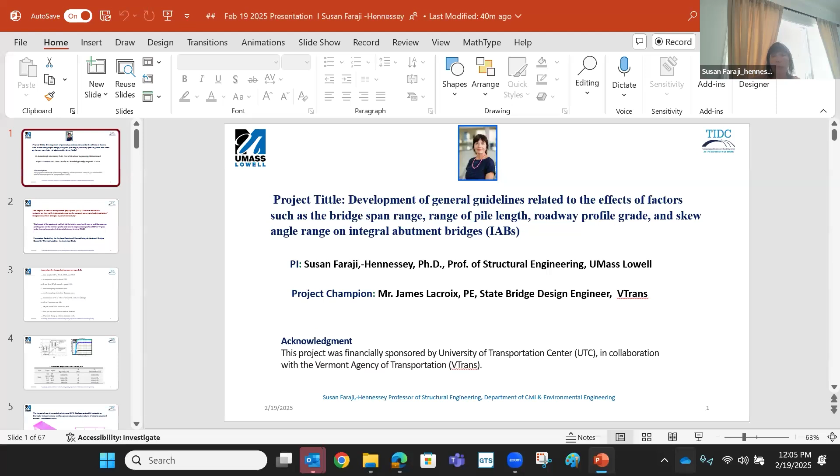So what I have been doing is I have been looking at different aspects. Let me show you the last thing listed on this slide, which was parameters controlling the in-plane rotation of skewed integral abutment bridges under thermal loading. This was analytical work that I did, and it has been very useful because the issue we have with integral abutment bridges, especially when skewed, is a problem.

So this is a presentation I'm going to give on this topic in France this coming July, and I have presented that particular topic many times. I have a few slides I can go over. The other one, in the middle of the page, was looking at the impact of abutment wall height, span length, and soil profile on design of piles and girders.

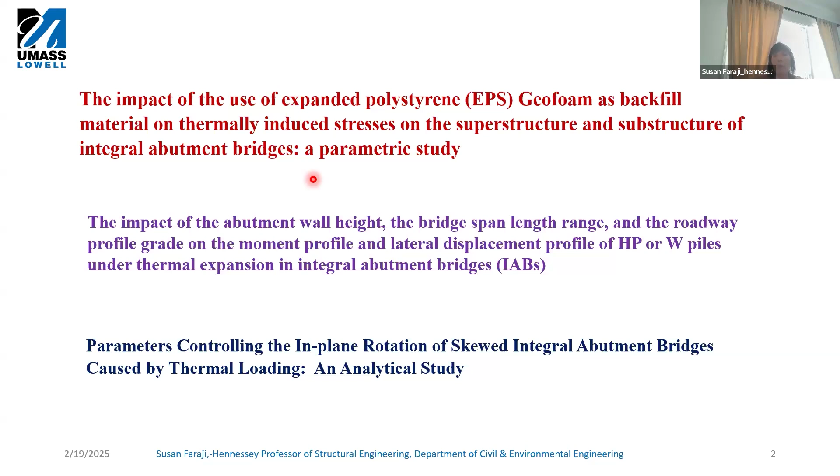Today my main focus would be the first topic here, which is the impact of use of EPS, or geofoam, as a backfill material in integral abutment bridges, and looking at how that impacts the girder and pile design. The major issue with that is how do we make sure we do that correctly.

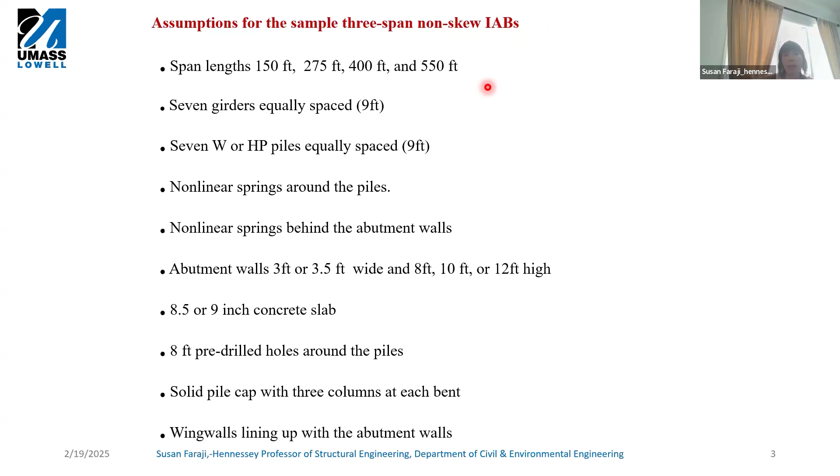For this particular TIDC project, from the beginning I have created many sample three-dimensional finite element models with different span lengths, looking at different abutment wall heights and soil conditions for analysis purposes. The type of soil I've been using behind abutment walls and around the piles was original information I had for one of the bridges in Massachusetts, which I've worked with in the past to make sure everything is consistent.

Now let's look at this particular topic: use of EPS. When it comes to use of EPS for reducing pressure behind the abutment walls, one of the issues we have is how to model and consider the EPS. Should we use linear springs? Should we use non-linear? How do we go about it?

As you see here, when you have an abutment wall, we use EPS with different thicknesses depending on our span length and abutment wall height. We decide what kind of thickness to use for the EPS, and then we go through our analysis with the compacted soil under the approach slab behind it and all that.

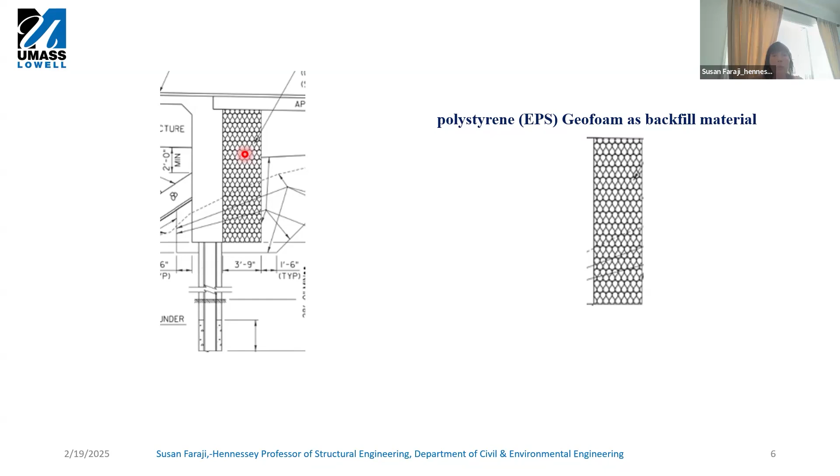So I looked at linear springs and all that, and finally it was very difficult to get information about EPS from manufacturers. So I decided to take my EPS and model it as a solid block, the same way we model pile caps as a hammerhead or solid, and treat it the same way. This way I didn't have to second guess whether I was doing it right or wrong. So that's what I did.

The other issue I was dealing with was our modeling technique. I'm talking about two things here: the modeling technique that impacts our results, and the other issue of when we have our girders. In my sample bridges I had 7 girders, and how do you link them together?

The original design I had from a 150 foot bridge in Massachusetts had cross bracing, which sometimes could be in a form I'm showing you on this slide. This makes modeling very difficult in the sense of how do we connect it, how do we define additional nodes. Sometimes these cross beams connect between the web and the flange, and sometimes, as in different papers, people model the flange separately and the web separately to handle the cross bracing.

So I decided to reuse this approach because one other problem we have with three-dimensional models is the way we link the slab and girders together—it's too flexible compared to an actual bridge, where the slab and girders work like a grid together. So I said, what if instead of using cross bracing between girders, I use a rigid plane element? This option was available to me in the GT STRUDL software I'm using.

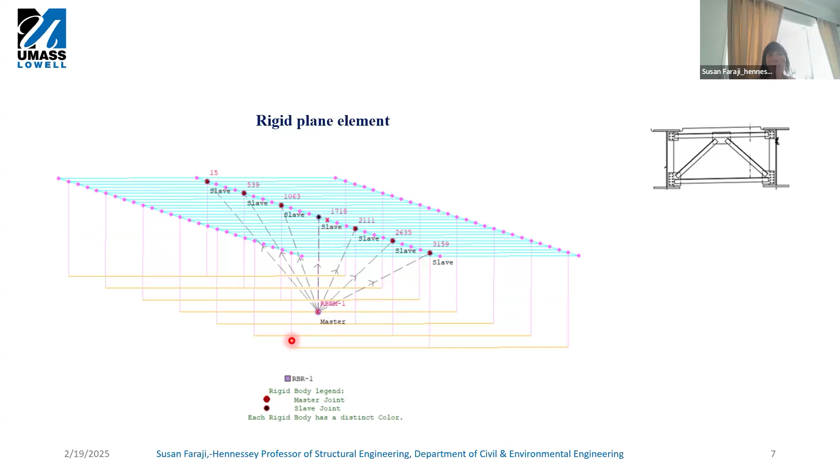The picture on the left shows how that works: there's a master node at mid-span, at the width of the bridge in the middle, which links the different nodes that exist on the girder to that node. In other words, it creates a rigid system. This was tested, and the results are pretty good compared to what we get using the previous approach.

So again, as I said, there are two different important factors here.

This is a topic I'm going to be presenting in March at University of Miami's symposium. So again, I repeat, the two aspects are how do we define our cross bracing, and the other is how accurate is our modeling of geofoam.

Now let me show you a few slides on the results comparing EPS with different thicknesses to dense soil. You'll notice in all of these, I used 7 girders. The difficulty with integral abutment bridges is what we call edge effect, where towards the edges of the bridge the impact is different. All the girders don't behave the same way, and this is especially critical on the piles.

In this particular example, I used 7 girders, so we look at the plate girder at the center line of the bridge to make sure those edge impacts are not present.

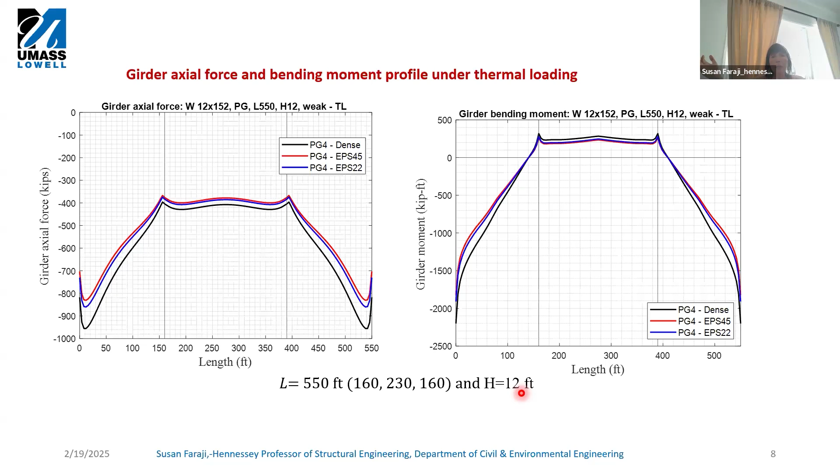As I said, I ran different examples from 150 to 550 feet to see the changes based on span. This one is for the longer span, three-span bridge.

Now look at this table, which takes information from those plots and lists how much change we see in axial force at the abutment, because the bottom line is the connection. The more important factor in girder design is the connection, especially if it's a moment connection, like my example with the wall.

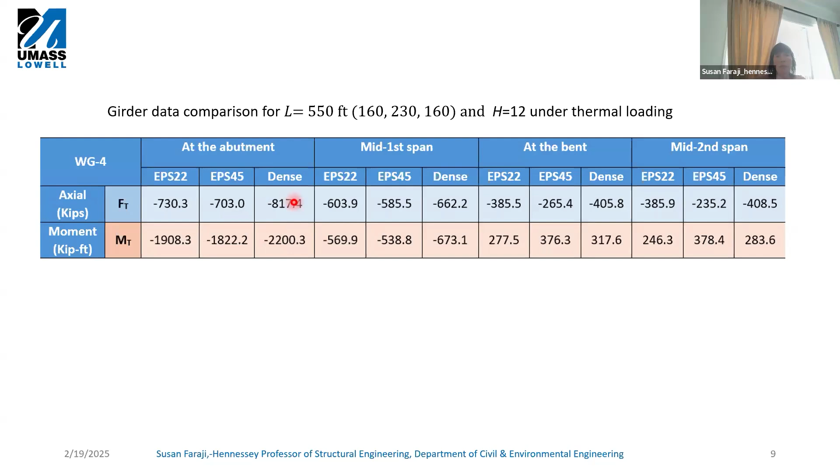As you see, by using EPS, we give more flexibility, and the axial force in the girder decreases, and so does the bending moment.

So then we look at the pattern, and the question arises: if the wall is moving more, would that not have a bad impact on the piles, since the piles have to move more?

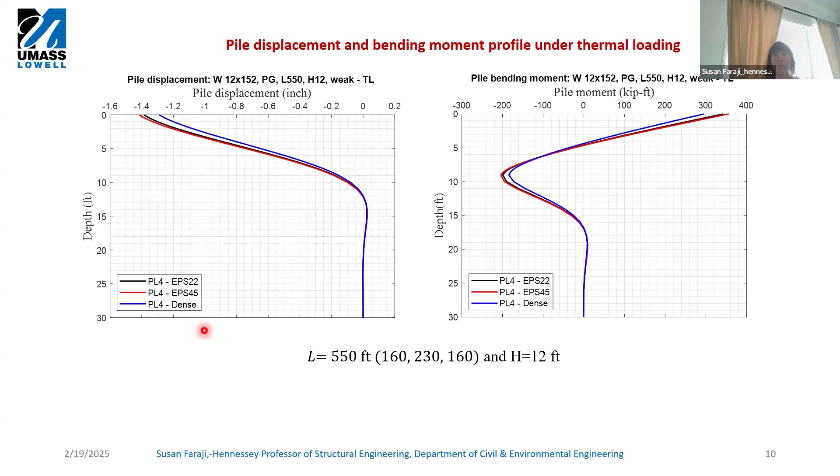This is summarized in this table, where delta, the first row, shows displacement at the deck level, and the second row shows displacement at the pile level, at the bottom of the wall. M1 shows the moment at the connection between the pile and the abutment wall.

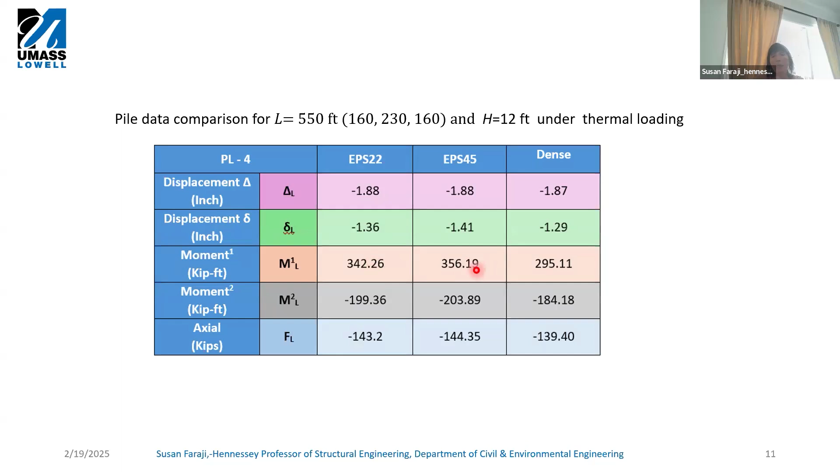All these examples ranged from 150 to 550 feet. For shorter spans, I used HP piles, and for longer spans like this one, I used W shapes for the piles. As you see here, using EPS results in some increase in bending moment in the piles.

We've done lots of analysis for truck load and dead load. Of course, temperature load doesn't happen by itself, it's accompanied by dead load, but the focus here was just the impact of temperature. I have extensive results for dead plus temperature, for the truck, for the TIDC project, in a complete documentation I have to submit by the end of this coming summer. Those who are interested can always have access to it.

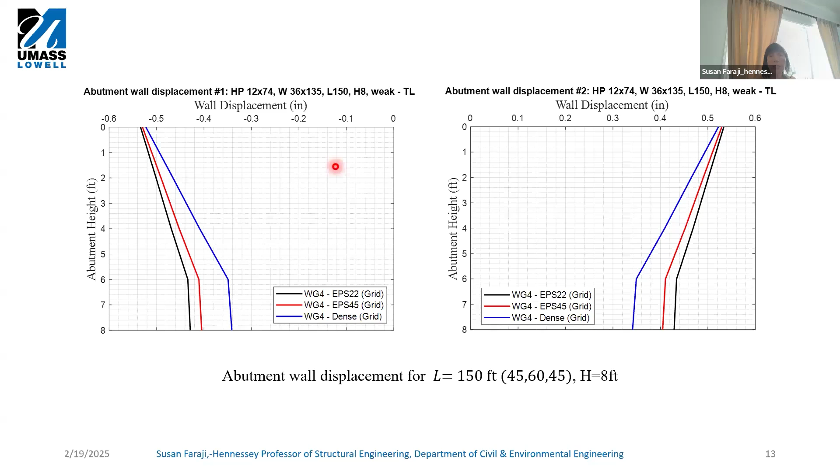This again shows the wall movement for the shortest span I used for my sample bridge, and as you can see, the impact is very small.

The same thing for the 150 foot span here, showing plots of axial force and bending moment over the three-span for the girders. In this case, for the 150 foot bridge, the height of the wall was 8 feet.

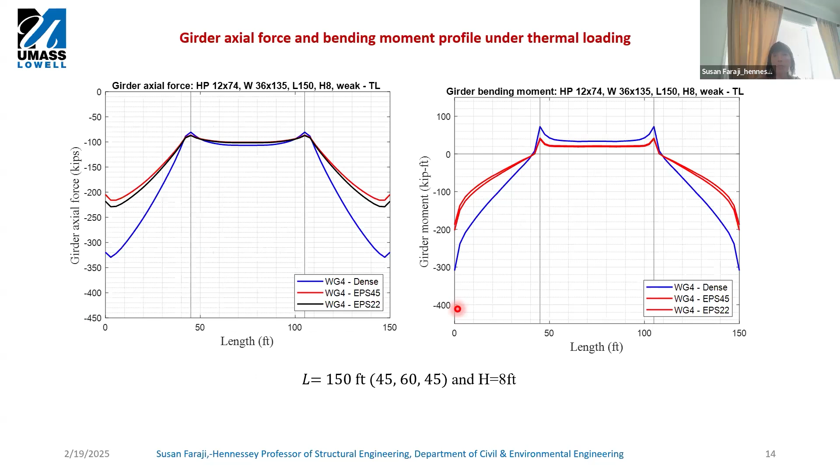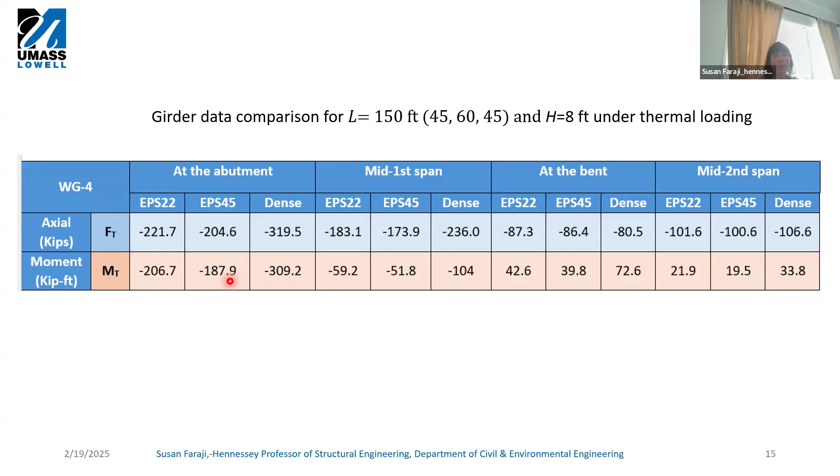Again, you see the similar pattern, but this time when we look at the maximum value in the bending moment, again, we see that decrease with EPS compared to the dense soil behind the abutment wall. And actually, you see major changes.

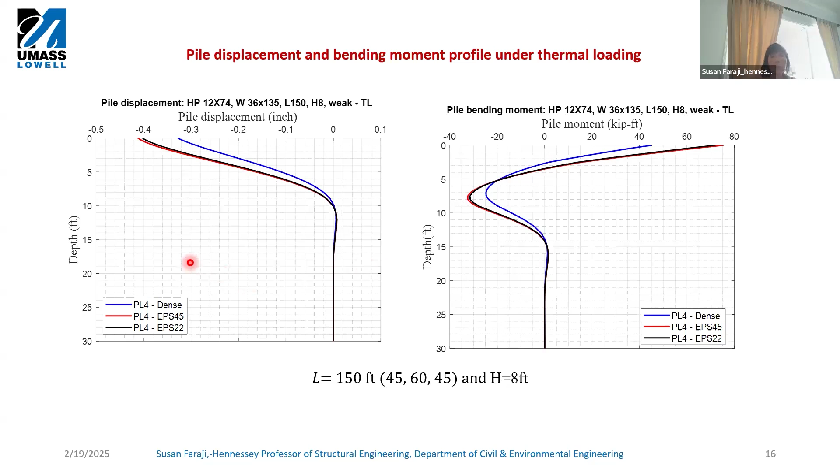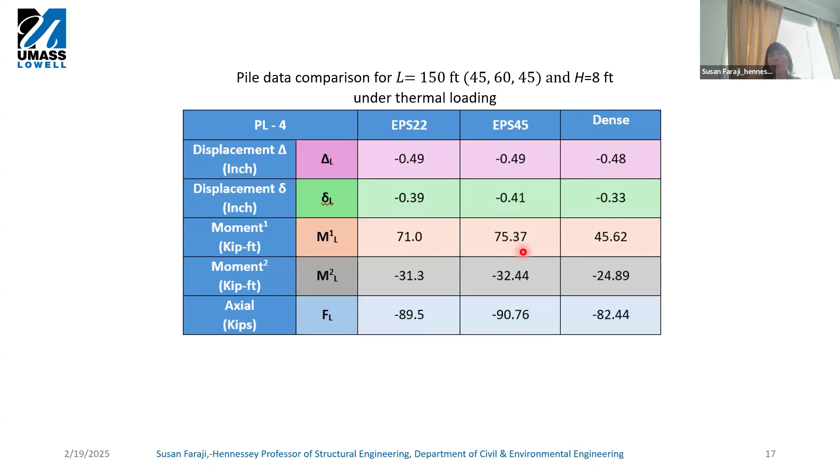But then here is another displacement profile for the 150 piles that shows the same similar pattern. And this is the table where, again, we are just comparing bending moment M1 at the connection between the pile and abutment wall. You notice that for the case of the 150, there was a huge increase, but still, because the moments are small, the impact is less noticeable on the piles.

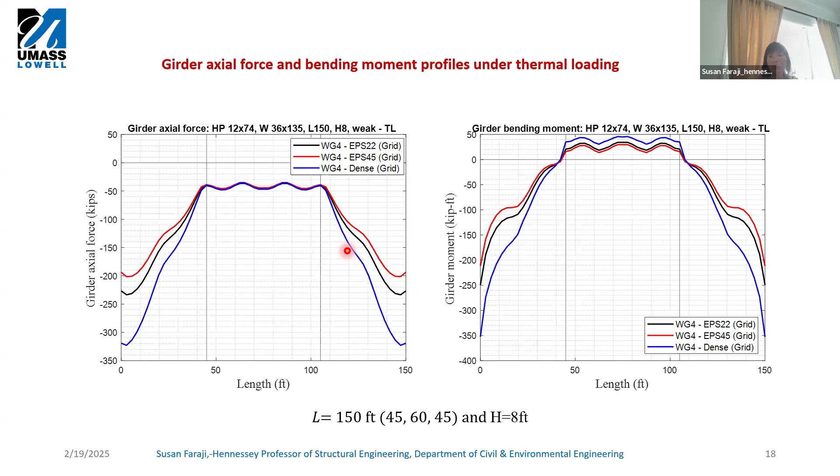And in this plot here, I was just trying to look at what I call the grid system, introducing those rigid planes into my model. As you see, the other plots of axial force and bending moment were smooth, but when you use these rigid plane elements, you see the bumpy locations are just where those plates are coming in, but still the results are very similar. I'm trying to work on how we make those points more smooth. The reason I'm insisting on it is it makes modeling so much easier compared to trying to introduce cross bracing.

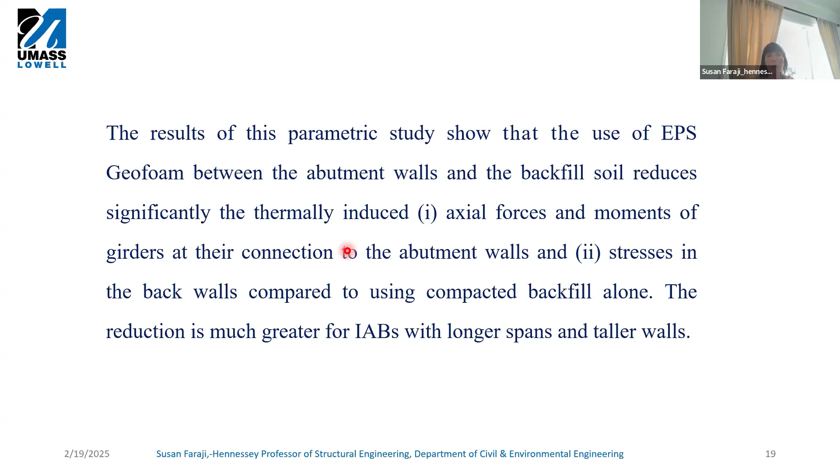All right, so the bottom line is it is obvious that use of EPS has a major impact on our girder design, our piles, and design of our abutment walls. But it is obvious that EPS would be more critical to be used when we have much longer spans.

Very quickly, because time is limited, I want to go over this. I have presented this particular topic, looking at impact of grade profile and span length and all that, in the previous presentations. And one of the things that is important based on what I did here, when I call it K1 and K2, is because in integral abutment bridges relative stiffness matters.

What is important here is it really doesn't matter whether the difference of the stiffness is coming from sloping ground, from abutment wall height differences, or compactness of the soil behind one abutment with respect to the other. So that's why it is important. One of my findings on this was, when you don't have perfect symmetry at your abutments, you really need a 3D model if you want accurate results.

So very quickly, all of these plots that you see, Mr. Harsh Gandhi, who is my PhD doctoral student, has been creating, and I'm sharing them with you. So for example, here I'm showing that for a 150 feet span bridge, one abutment compared to the other abutment has the same identical conditions, or one has 5% more stiffness compared to the other.

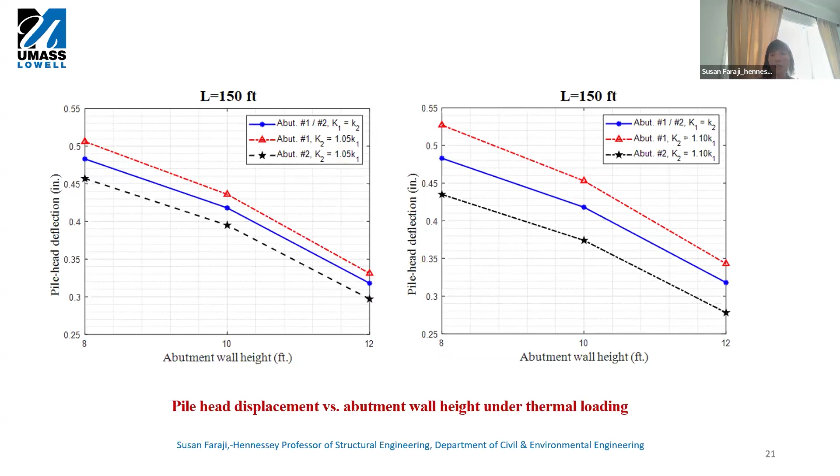And so it shows what happens to the change we see over the abutment wall height. What is the impact of abutment wall height compared to when the stiffness behind the walls is not the same? So these are all going to be in my report, and I have created lots of plots that preliminary design engineers can use to help their design. So I'm going to go quickly through these.

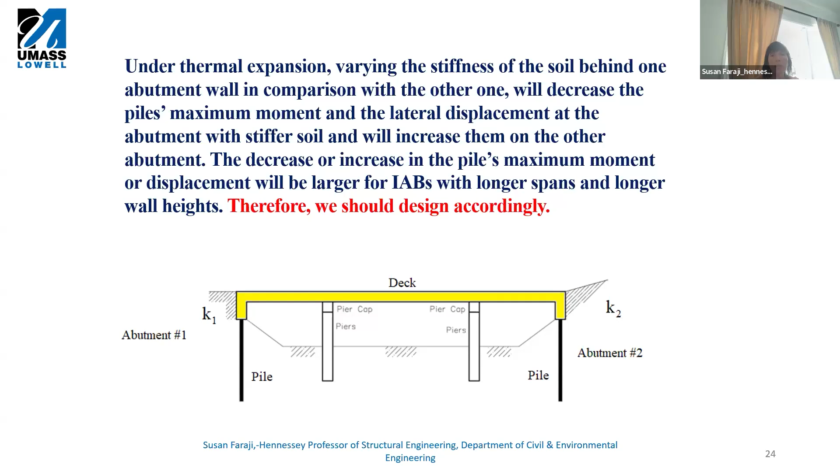And so what I'm trying to say is when you don't have symmetry at your abutments, if you want to design your piles more accurately, it is crucial that you go with 3D, because the impact cannot be neglected.

And also, this is a topic on parameters controlling in-plane rotation of skewed integral abutment bridges. This analytical study, I think, was very crucial, and it has many benefits, because I'm going to present this in Europe this summer at a conference and it will be published.

And based on this parametric study, it is obvious that what controls in-plane rotation of the bridge is not only skew angle; the rotation of the deck of the bridge depends on length over width. A over B is the ratio of length over width of the bridge. So if I have two bridges of the same length with different widths, they are going to behave differently. So again, I have plots and equations that can very easily be used. And the other thing is the tangential stiffness coefficient on the boundaries of the bridge.

What that says is, for example, what I call the beta factor, which comes from the friction between the wall and what is behind the wall, and also the impact of the wing walls. Let's say if your wing walls are lined up, the resistance would be less compared to the wing wall coming at some angle, all right?

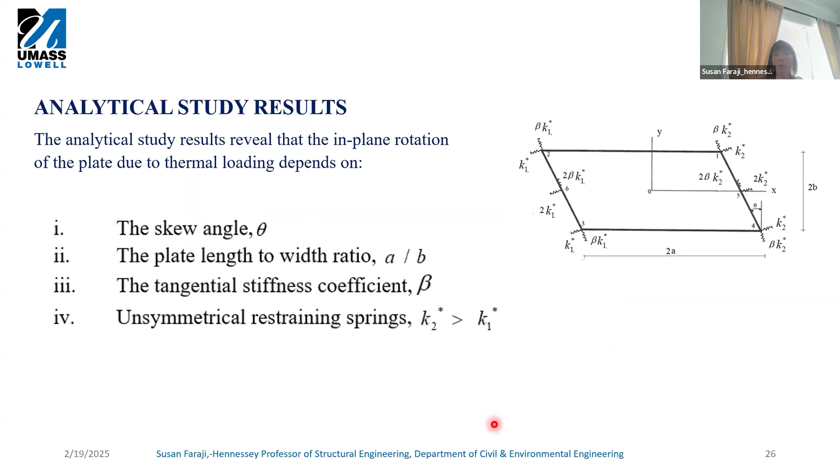When I say decreases, it's because I'm comparing it for beta. What is beta? Beta is the friction force behind the abutment wall. The normal one for our practice is around 5%. So I'm comparing 0.01 up to 0.15, which I don't think we ever hit. Around 0.05 is a logical value.

So here again, we go to the case where length over width becomes 3. Now you see what happens at the obtuse corner? The displacement goes negative, in the sense of comparing to the case when we have no resistance. So it just goes below 0. And the same pattern you see for both sides.

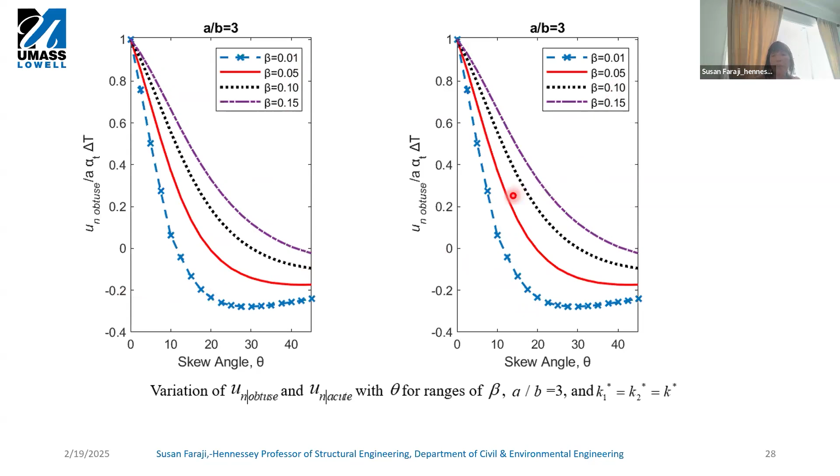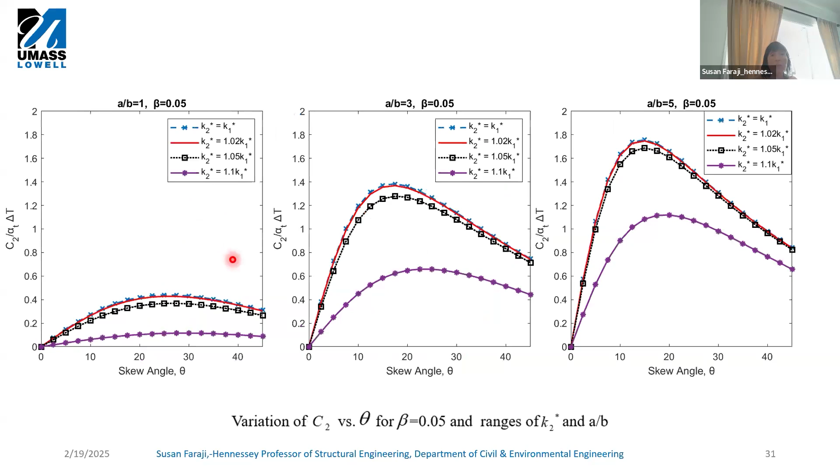This slide shows rotation versus skew angle when K and the boundaries are not the same. In other words, more variation, and how that impacts the behavior. Usually the maximum rotation reaches its maximum at 20 degrees, but as you see here, it changes based on the case and different values of beta and span. I'm going to skip these. Now what I'm showing here is for A over B of 3.

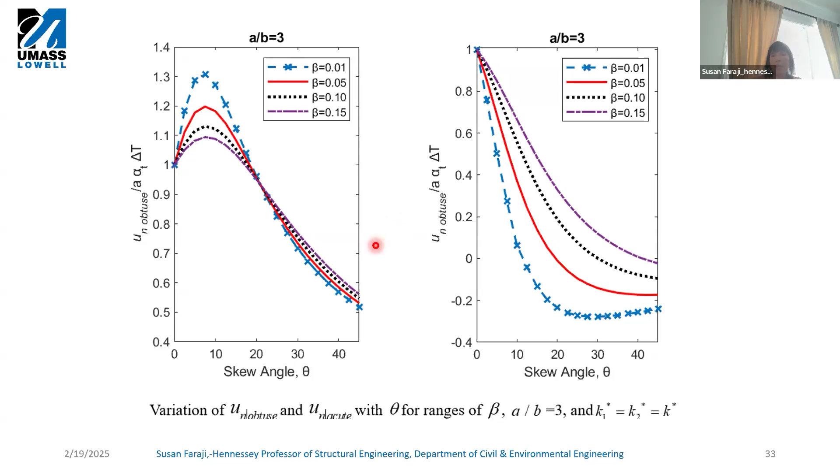The point here is that one of the things we experience for skew integral abutment bridges is that, based on different conditions, the acute corner might go in the opposite direction and cause unexpected cracking. So I find this very useful. I have tested this on a sample bridge and it is consistent with what I'm showing you here.

Because of all the work done on the TIDC project, we were lucky to get a subcontract for a bridge in Hartford, Vermont. UMass is funded by HNTB Corporation, and I have a team working together on this new project. The amazing thing is that many things we learned from the TIDC project we are going to implement. For example, in TIDC I was using a 550 feet span, because this particular bridge was 550, and I was looking for proper numbers that made sense.

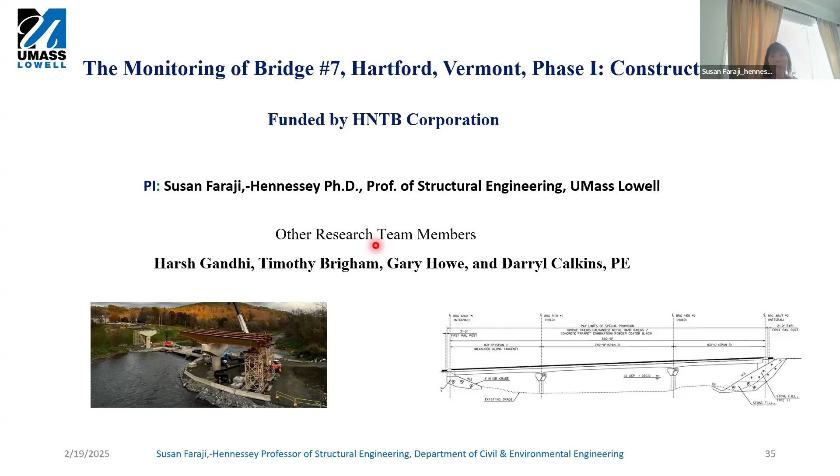So one of my bridges has a span of 550. In this particular project, the construction phase is coming to an end, and then we are going to do the data collection and data analysis.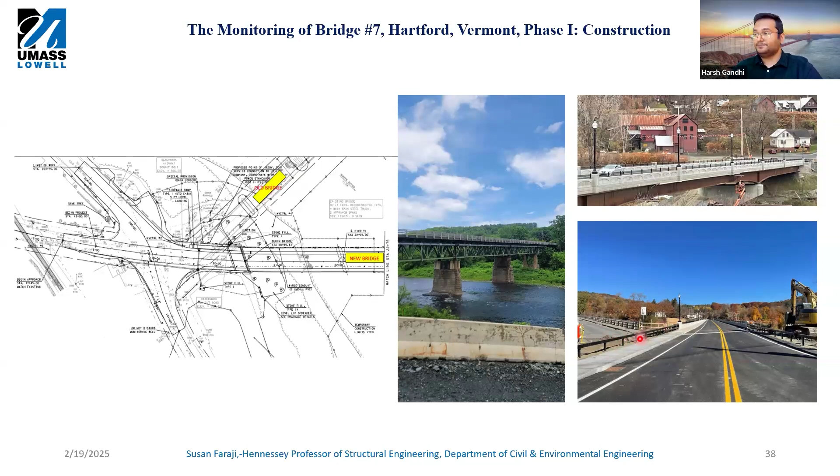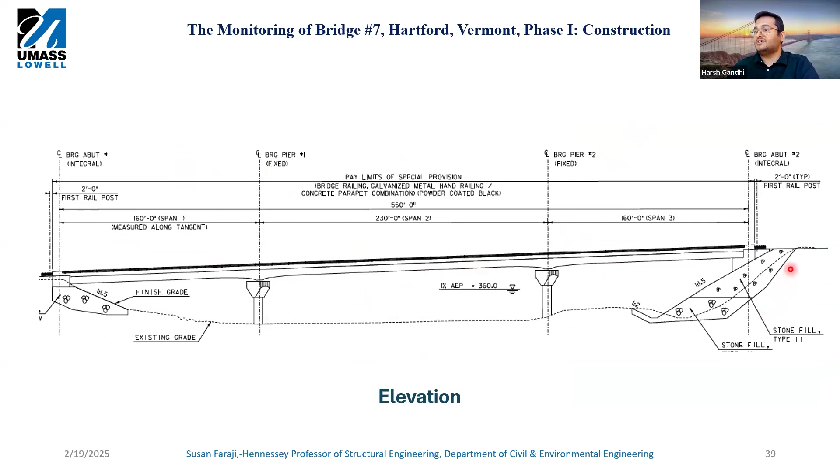So this is the typical elevation section for the New Hartford Bridge number 7, which has 3 spans: spans 1 and 3 are 160 feet and the mid span is 230 feet. The typical slope for this new bridge is approximately 3.8%. And in this image, we can see the typical cross section of the bridge from abutment 1, where we can clearly see that this bridge has 4 girders equally spaced at 10.5 feet, and it is equipped with cross bracing as well.

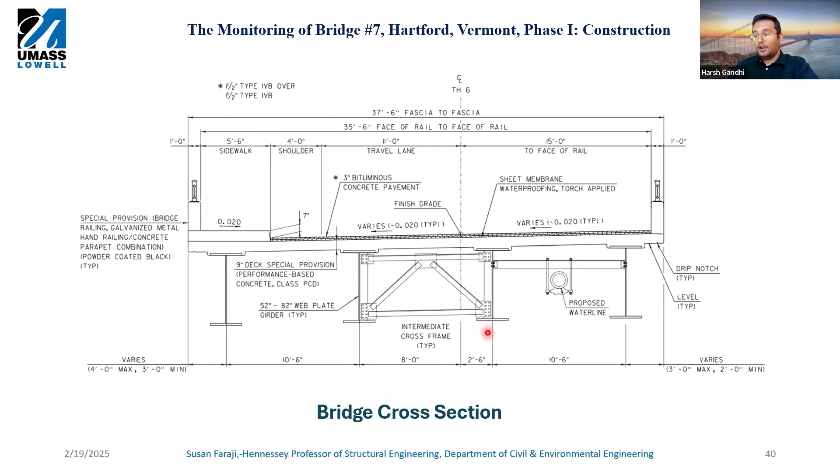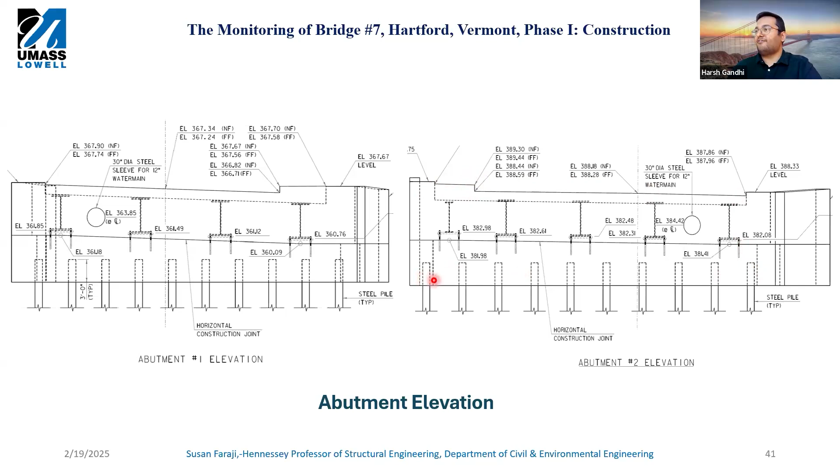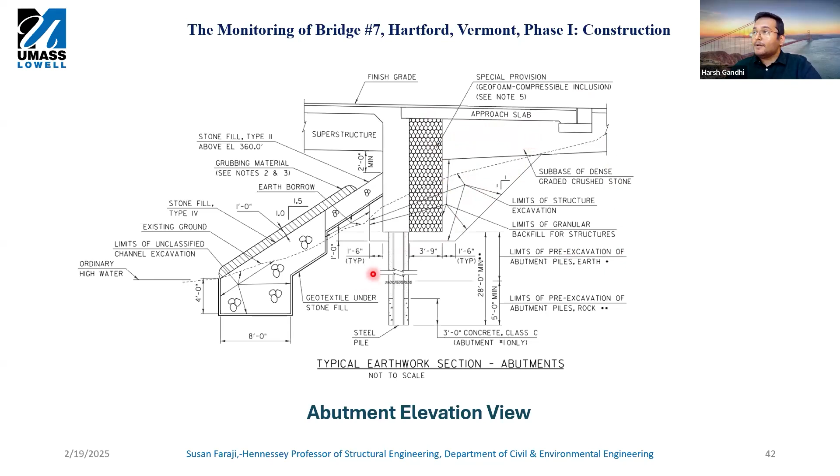And here we can see that EPS 45, which is expanded polystyrene, also known as geofoam, is being used as a backfill material. And behind that, there is granular compacted sand. So the whole backfill material is a combination of EPS 45 and the granular dense compacted sand. As I mentioned, the novelty of the bridge is due to its big span length of 550 feet, the skew angle and the EPS as backfill.

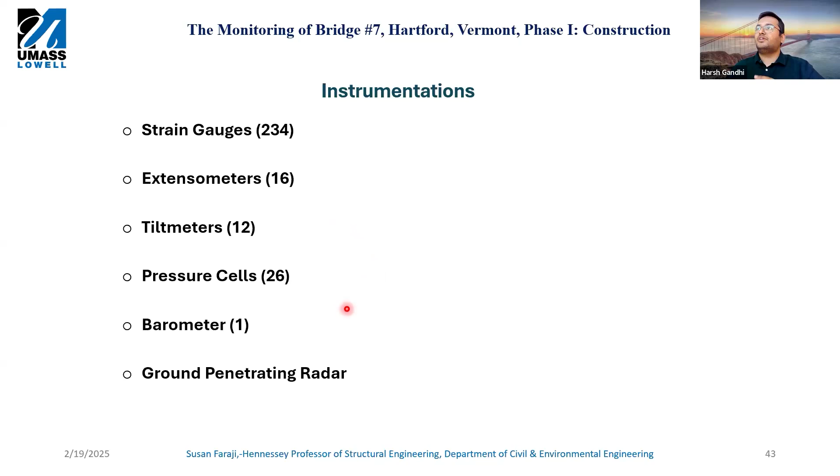So to monitor the behavior of the superstructure and substructure accurately, many sensors have been installed, such as strain gauges, extensometers, tilt meters, pressure cells, barometers, and we are also working with ground penetrating radar. I will go through each sensor one by one. To begin with the strain gauges, a total of 234 strain gauges have been installed on the girders and the piles.

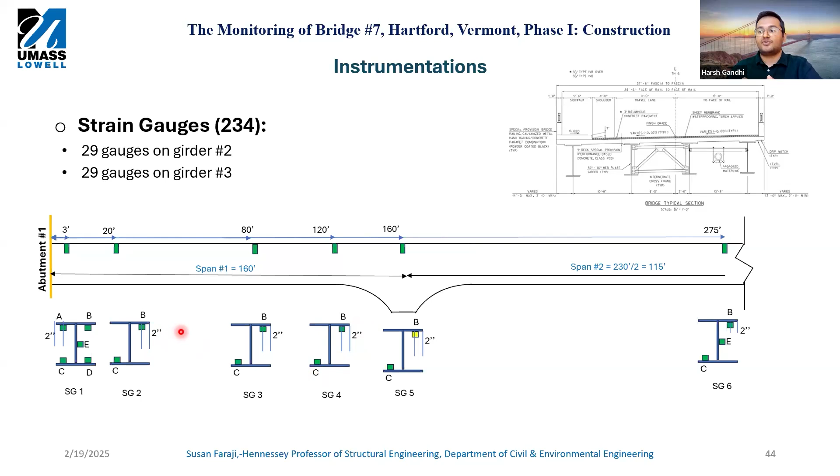By doing so, we are going to analyze the axial force, the bending moment, the torsion, and the shear using the data that we collect from the strain gauges. Each strain gauge installed here can measure a change in strain up to 5,000 microstrain. These are pictures of the strain gauges being installed on the girder. Here we can see this is location 1, because there is one on the flange, another one on the other flange, and one in the middle.

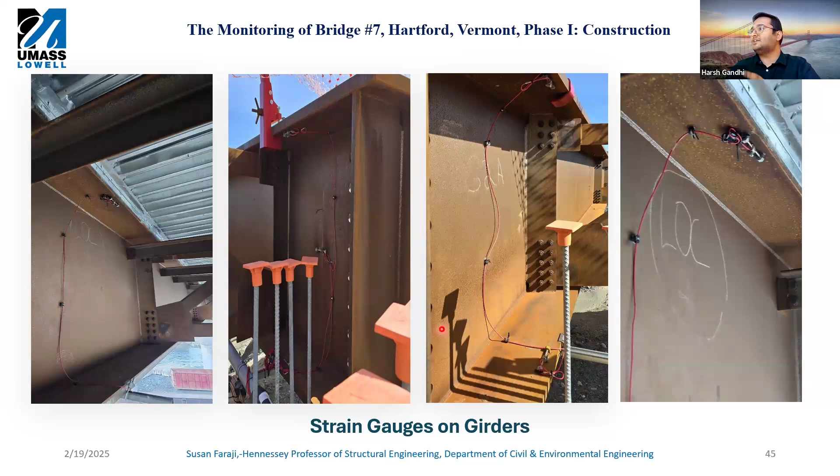And this is the other side of the girder. So those are the pictures of the strain gauges installed on the girder.

Now we have also installed 176 strain gauges on the piles, and out of 10 piles, for the end effect, we have installed on pile number 1, 2, 9, 10. And in the middle, we have installed the gauges on pile number 5 and 6, where at the top two locations at each elevation, the strain gauges are configured in this configuration where 4 gauges were installed on the flange, whereas at the remaining locations, we have just installed 2 gauges.

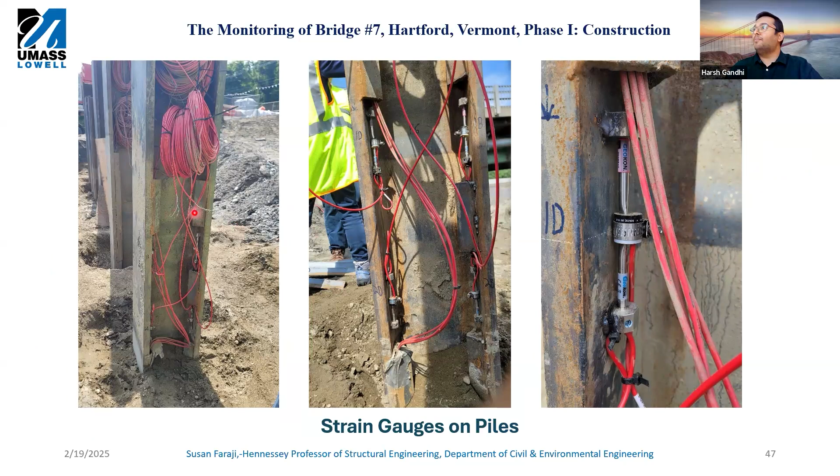Similar to the strain gauges, we have installed a total number of 16 extensometers on abutment 1 and 2 just to see the contraction and the expansion happening on the bridge during temperature changing events. And for those, 4 extensometers were installed on the wall and 2 on each side of the geofoam on the wing wall, so that we can clearly measure the amount of movement happening at the abutment level. And these extensometers are capable of measuring up to 6 inches of expansion and contraction.

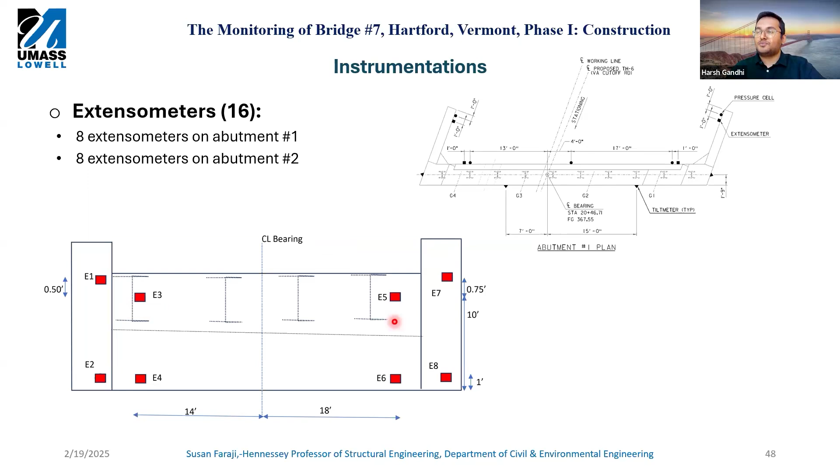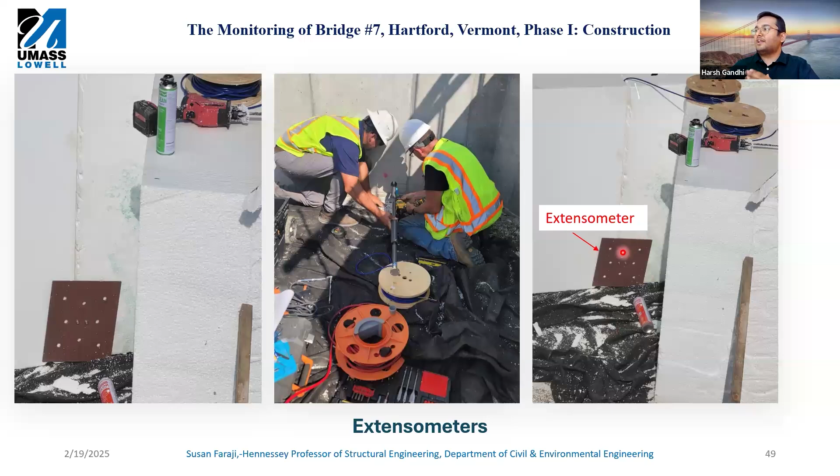So here's the image of those extensometers that have been installed. So this is the extensometer tube, the base plate, which is rested on the face of the geofoam. And then later the backfill with the granulated soil was placed here so that we can clearly measure the amount of abutment wall movement.

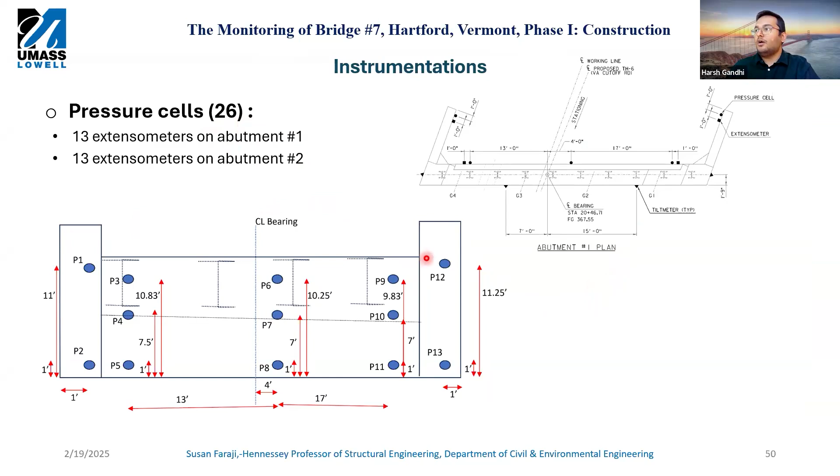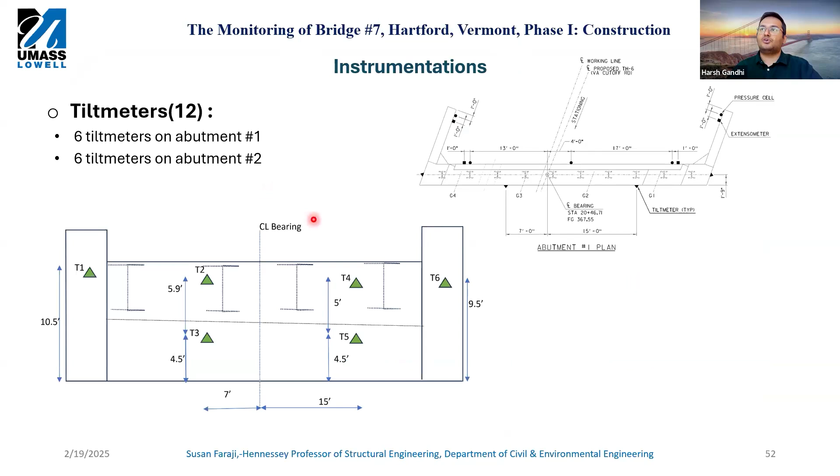Now, as I mentioned, those were all the installed sensors that we did on the integral abutment bridge at the abutment and on the girder level just to measure the bridge behavior. But we are also using ground penetrating radar just to see the amount of movement that would happen at the geofoam level and at the backfill level.

And to do so, we have installed a steel plate as a reflector for the electromagnetic wave used by the GPR. And by using this configuration, we will measure the amount of displacement or movement that would happen at the geofoam level and at the backfill level. So those are all the instrumentation that we're going to use to measure the bridge behavior.

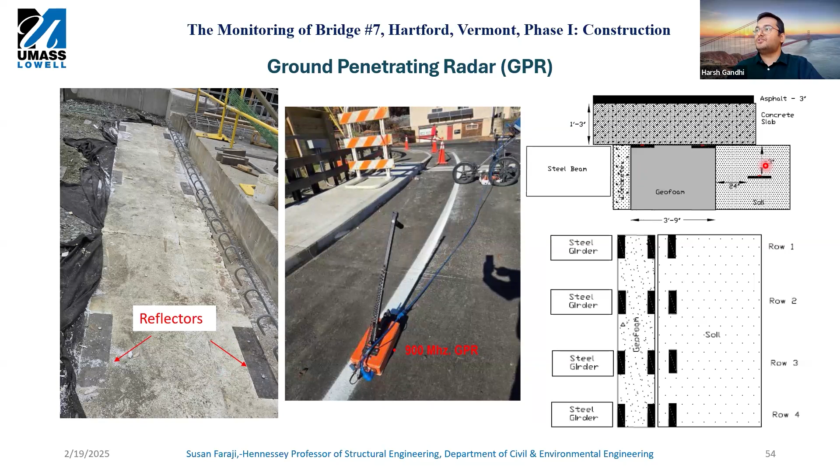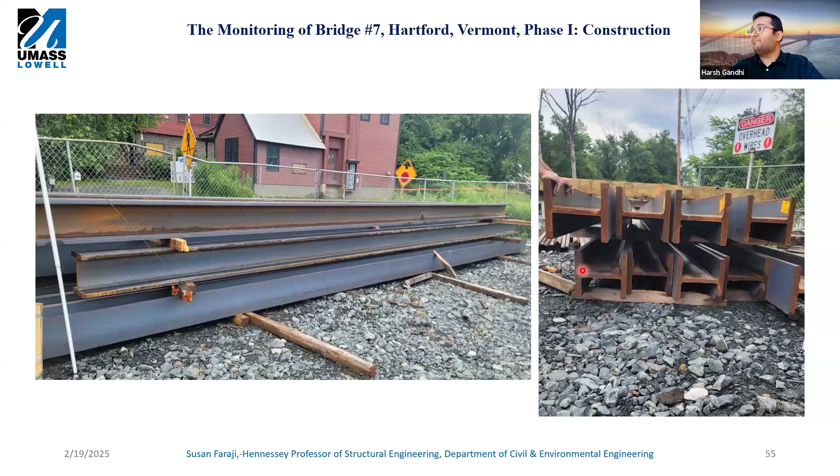And during the construction, we have taken many pictures of the bridge, and let's go through those pictures. So here, this one shows the piles that are going to be installed at abutment 1 and 2. As I mentioned earlier, at abutment 1 the piles were pre-drilled. So the pre-drilling was happening at the abutment 1 level. And this is the causeway building for the bridge construction.

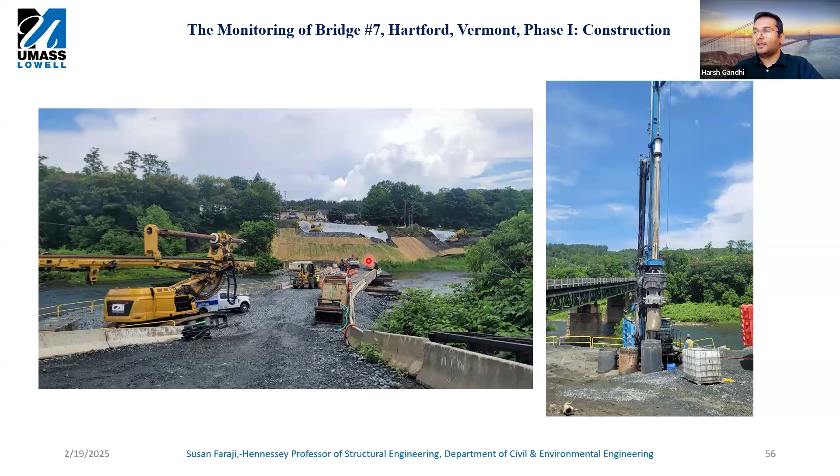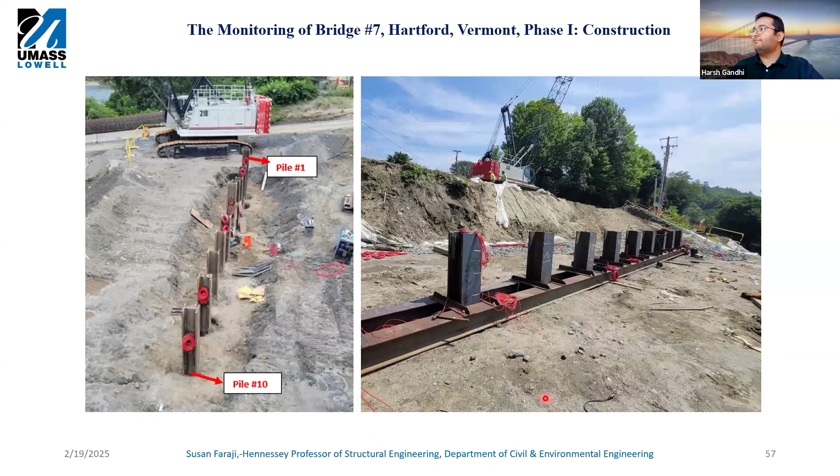This image shows the EPS that we were talking about. So this is the abutment under construction, and then these EPS were installed with adhesive and attached to this abutment wall, and later the backfill was placed here. So this is EPS 45 that's been used in this project.

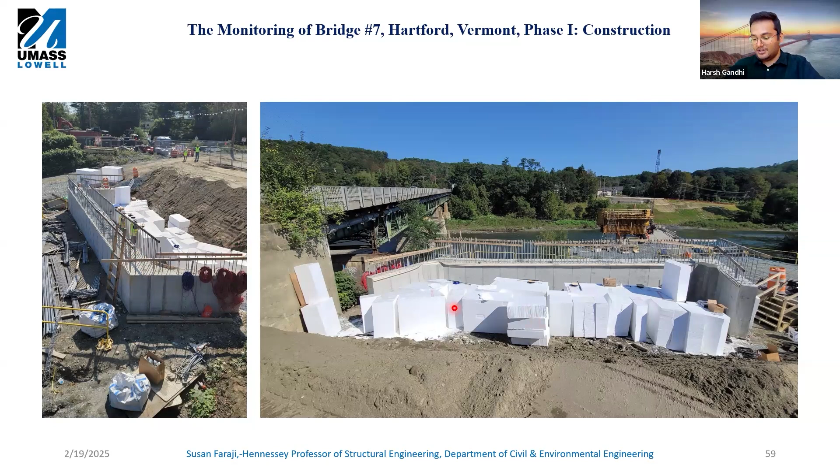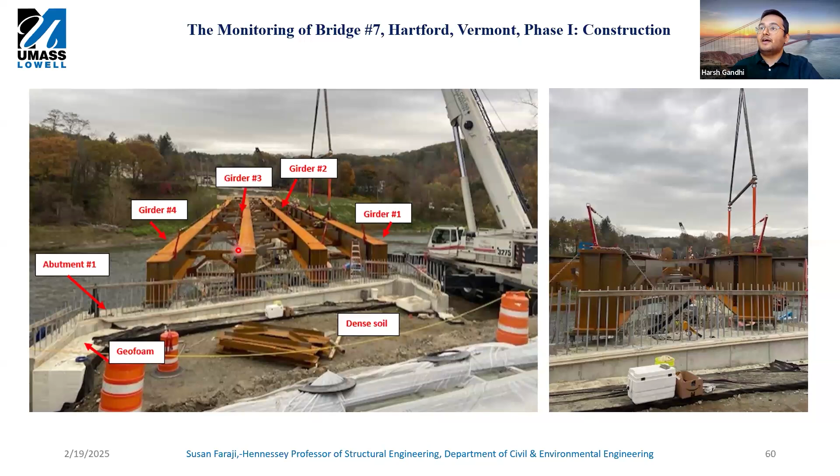This image shows the girder installation at the abutment from the abutment 1 side. So girders 1, 2, 3, 4 can be clearly seen, and the cross bracing that we were talking about is installed here.

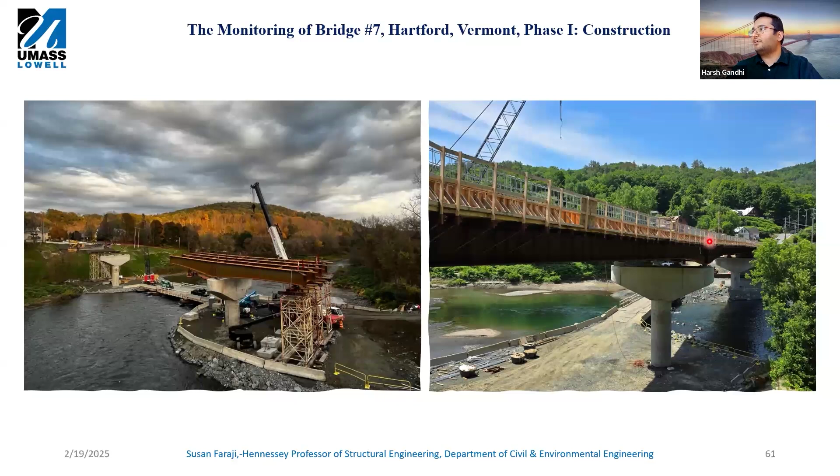Now, these are the girders during the installation and a few images of the girders after getting installed from different abutment sides. So this left image shows the backfilling of abutment 2. The girders here in black, which are covered, are already installed. And after the girder installation, as I mentioned, the granulated, compacted, dense backfill is going to be filled in multiple layers. So here the backfill is getting compacted and installed in multiple layers at abutment 2.

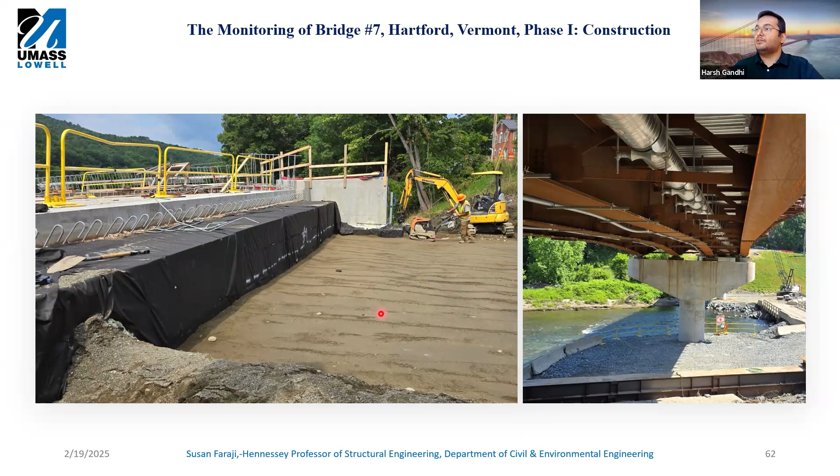A few more images. And now this image shows the data logger system that has been installed. All those sensors that were installed need to have data collected. By using this data logger system, they are capable of collecting data at 20 Hertz frequency at any given time. Currently, they are used at a 15-minute interval. But by using this data logger, we are able to remotely collect all the data from all the sensors that I have mentioned earlier.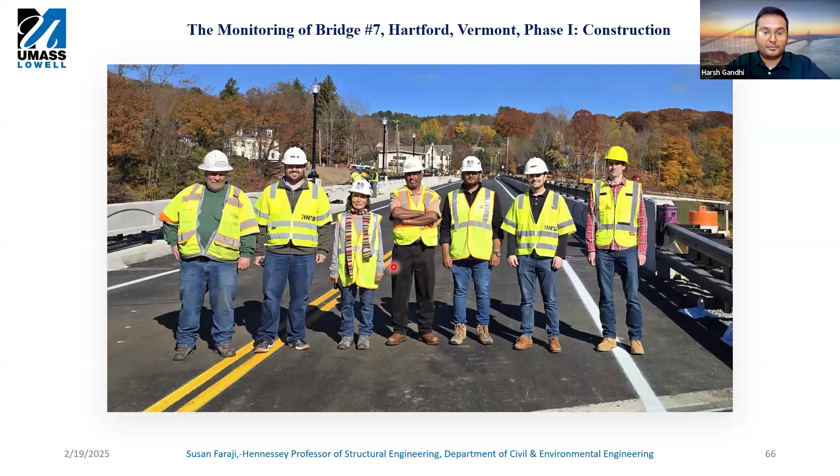Okay. Thank you, Harsh. One thing I want to say, because I think we are running out of time here: this is an HNTB project. We are in charge of data collection and data analysis. And we have made many site visits, and that's where all those pictures you saw came from.

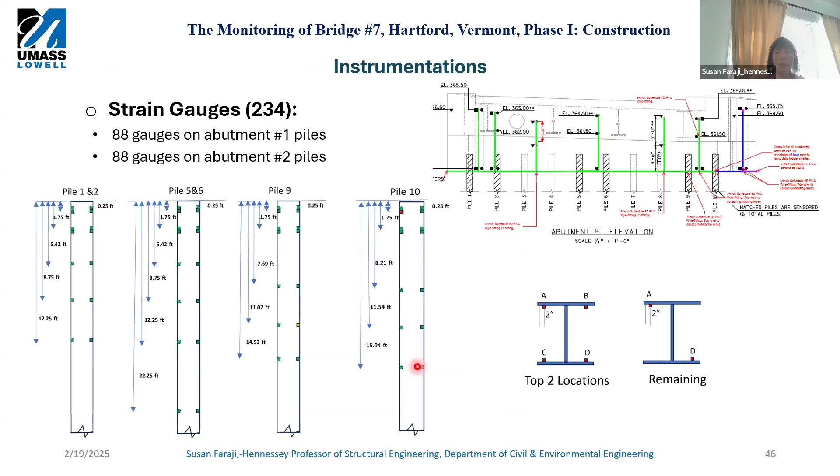Was that the question? Did I answer the question? I think you got it, Susan.

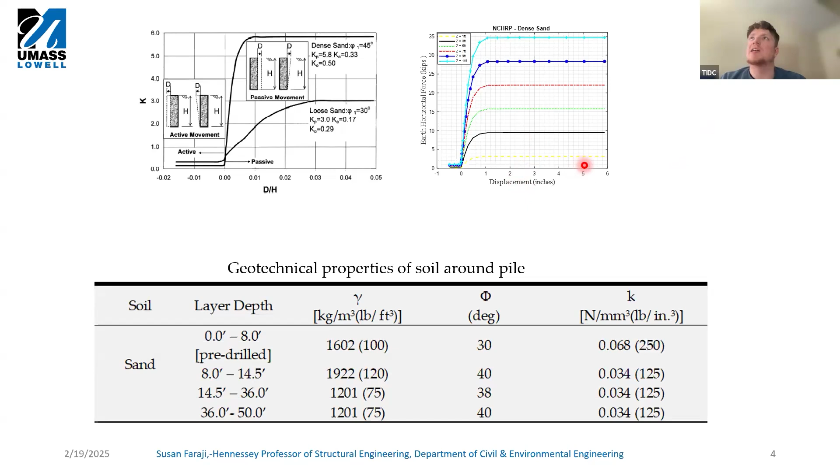Since you're already sharing your slides, the next one's on slide 19. Are the conclusions on slide 19 limited to straight, non-skewed bridges?

No, this particular bridge that I showed was non-skew, but let me tell you what I've been doing. I have tons of models on skew bridges. First I did my analytical work with a rigid plane with springs on the boundaries, then I created skew bridges with 10 degree, 20, 30 and so on. This particular model was non-skew.

Here the purpose was just showing EPS. As we know, because integral abutment bridges, you change a single thing, everything changes, redistribution of forces. The focus here was geofoam. So this is non-skew, and you see here I'm showing the pattern of displacement profile of the deck, what is happening. I was just trying to show that the most important thing is to model EPS as a block. If we go with linear springs, we never know what we are doing.

Again, I have done that work also. I looked at the linear spring, and if somebody wants to go with linear spring, like for example what I showed you, we are using NCHRP, then compare it to that. If your numbers are close to less than loose or something like that, you know that your model is too soft, is not representing your model. So again, I'm going to put those in my report that people have access to it.

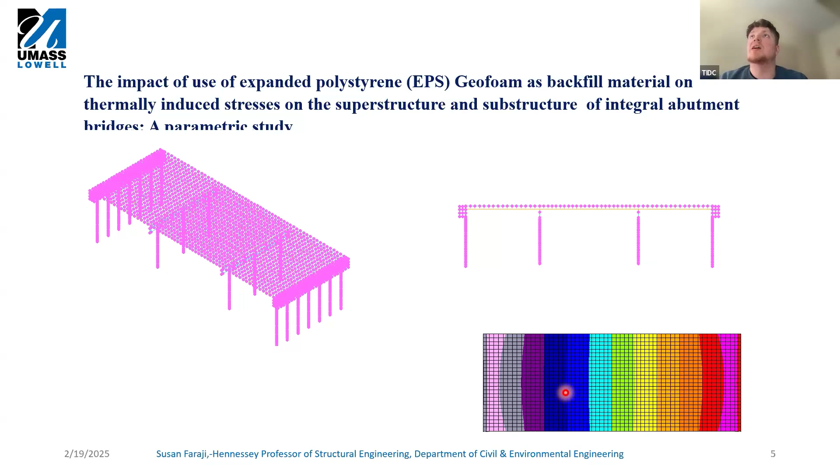Perfect, thank you. Another quick one based on the slides. Is beta a friction force or a friction force coefficient? It is friction force. So usually what we do, let me go to the page on that.

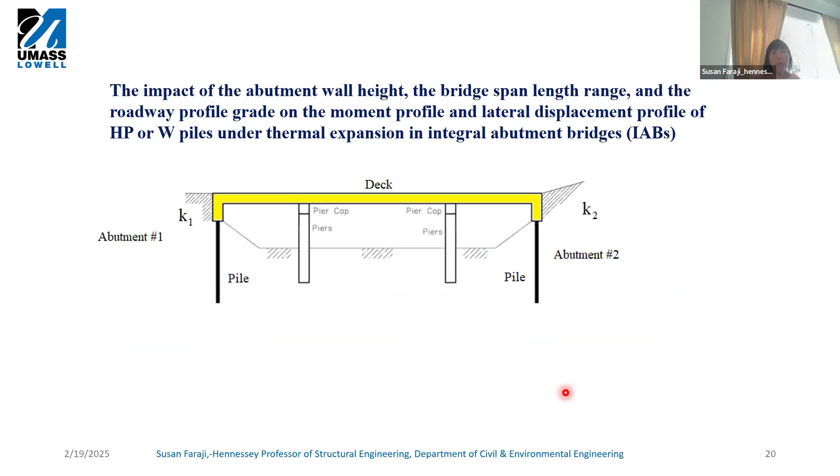I went very quickly, I didn't go into details very nicely because I have covered this before. We didn't have time, I knew that. You see, this beta that I'm talking about is, according to AASHTO, usually what we take, percentage of the friction force is proportional to pressure, right? So it's just the material we are using, if it is soil next to the abutment wall, that would be that friction. Beta is not a force.

And when you add the wing wall to it, then that would impact the in-plane rotation. So beta represents that resistance parallel to the skew, the wall. And beta is a parameter, it's not just the force itself.

Percentage. Great. And our next question fits along on this slide as well. Are the displacements in the beta/skew angle plots measured in the bridge longitudinal direction?

Yeah, this is the in-plane rotation. Let me just show you, for example, when this corner moves out, right, the deck rotates, in-plane rotation for the deck. By doing that, it pushes joint, this corner, joint 3 moves out more than joint 2. If it was non-skew, it nicely moves out and comes in, but this is just movement.

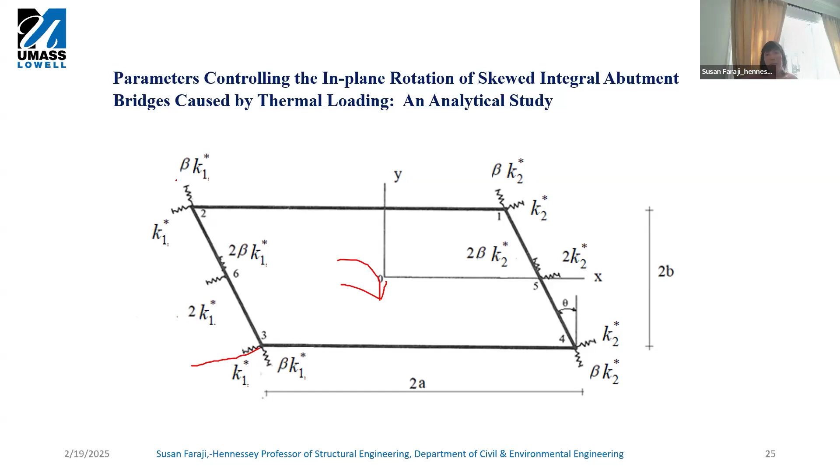Great, Susan, I have two similar questions, both from one of our panelists, Jim. What do you mean by geofoam modeled as a block? And what is the difference between the two geofoams you talked about?

EPS 45 and 22 - if you look at the manufacturer, that's one of the complaints that I have about the manufacturers. We have to dig all over the map to try to figure out the properties, because the companies making these blocks have the properties, but when we say EPS 45, that's the density, EPS 22 is it.

Then it's just like what's usually done for the soil. For the soil, usually what I showed you is what I do - sometimes people use a linear spring, I use a non-linear spring and attach it to the wall. So in this case, what I did, I took the same way that I model rigid plane for other things, modeled my geofoam, glued it to the wall, attached it to the wall and glued it to the soil. But I modeled it as a block element and a rigid element, not as a spring.

In other words, the same way, let's say for example a pile cap - when I say we have two ways of modeling the pile cap, I could have gone with a beam element, right? But that's too flexible. When you have a solid cap, that solid cap has to go as a solid element. So I did the same thing with the geofoam.